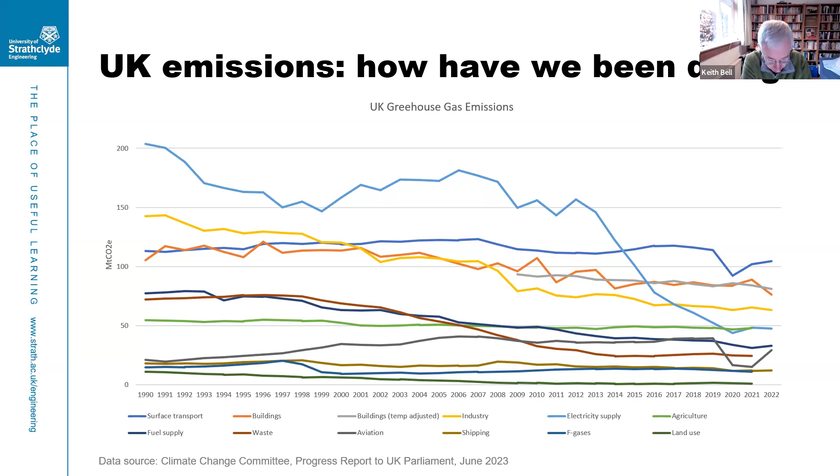So now the more dominant sources of greenhouse gases are surface transport, petrol and diesel vehicles, and energy in buildings. In the UK, we depend a lot on gas for heating our homes and other buildings. And then there's still quite a bit in industry in terms of industrial process emissions of CO2. Of course, greenhouse gases also include methane, which is why agriculture comes into the picture significantly as well.

Now, how we've managed to achieve such dramatic reductions in greenhouse gases from the production of electricity can be seen here, where that purple line represents the proportion of electrical energy generated from coal-fired power stations. It's gone down to almost nothing, actually. There's only 1 or 2 stations still operational, and they're quite low merit. They don't get used an awful lot. They're there a little bit for security of supply, I guess.

And the big increase in that yellow-orange line, which is low carbon sources of energy. We've had a fair amount of nuclear generation capacity, a little bit of hydro, but the growth there has really been thanks to solar power and especially wind power. There's a bit of a decline between 2000 and 2010 as some of the older nuclear power stations were closing.

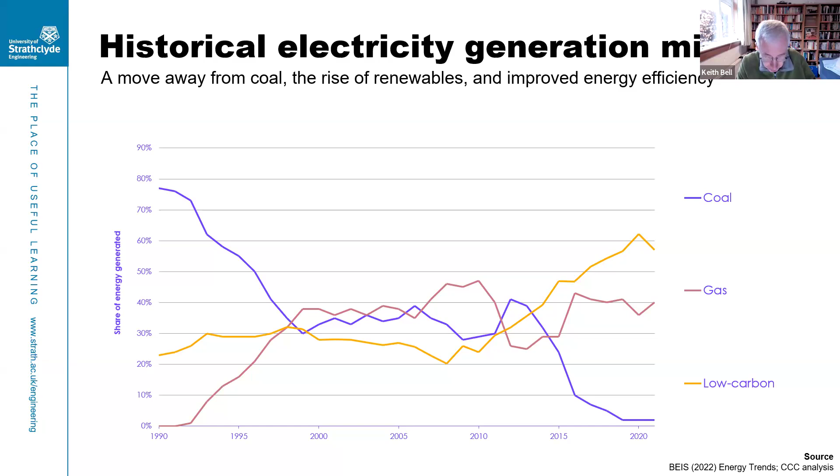The Climate Change Committee gives its advice on emissions reduction to the government in terms of setting carbon budgets, which means 5-year periods of time where we look at the uses of energy, but also other sources of greenhouse gases across the economy, and say, okay, we think our obligations as a nation internationally, in particular in more recent years in respect of the Paris Agreement, suggest we need to reduce emissions quickly. Looking at what we're already doing across the economy, where the emissions are coming from and what the costs will be of reducing emissions at different rates in different sectors, this is what we think we should be aiming at in a particular 5-year period.

Associated with that, this was the target that was agreed, or had to be agreed under the Paris emissions agreement, of a nationally determined contribution. This is where all countries coming to COP26 in Glasgow should be making promises about what emissions were going to be, a maximum level in 2030. So that kind of pathway from 2020 all the way through to 2050 helped to determine that nationally determined contribution, that NDC.

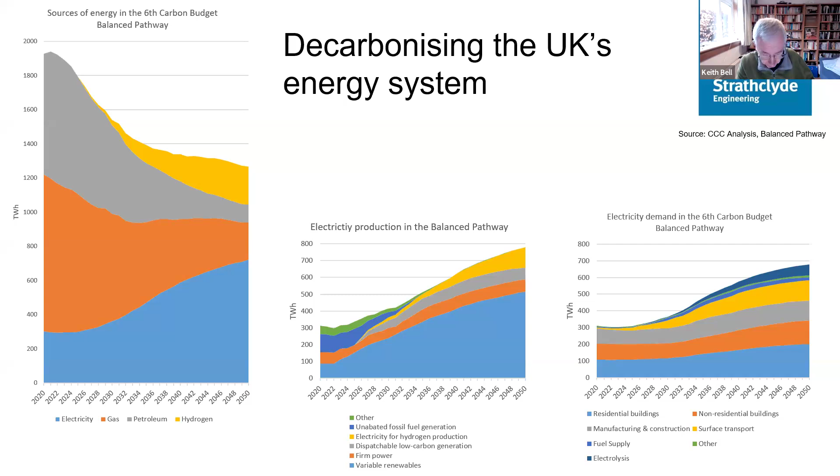But the question then for us as engineers working in the sector is how do we ensure that that supply of electricity, using these very different technologies from what we used in the past, is going to be reliable? Society depends on us. Can we make full use of low carbon electricity when it's available? And that, of course, is a function of the weather.

By changing the technology, it means we're getting rid of the synchronous machines that we've used for power stations for years and years, replaced with asynchronous technologies, wind turbines, solar PV panels. Given the variability of wind and sun, can we still meet demand all year round in every hour of the year? How do we build our new kind of capital stock? What's the capacity of wind and solar such that we don't waste the energy and we can maximize the utilization of the physical assets on the system?

And there's a broader question of resilience that I'll come on to as well. I think there are 6 kind of very particular power engineering challenges. As we get rid of the synchronous generation, the inertia of the system reduces. How do we make sure that the system still operates within an acceptable frequency band?

The short circuit current that synchronous machines deliver -- when there's a short circuit, there's a strong voltage source, the current becomes very high, and the high current is detected and helps the protection devices to realize that there is a fault, to isolate it safely. But if we're using things like wind turbines or inverters, power electronic devices, as the kind of interface between the energy source and the electricity system, they've got very strict current limits, and that short circuit current could be much lower. Will the protection devices that were designed for very different technologies still work?

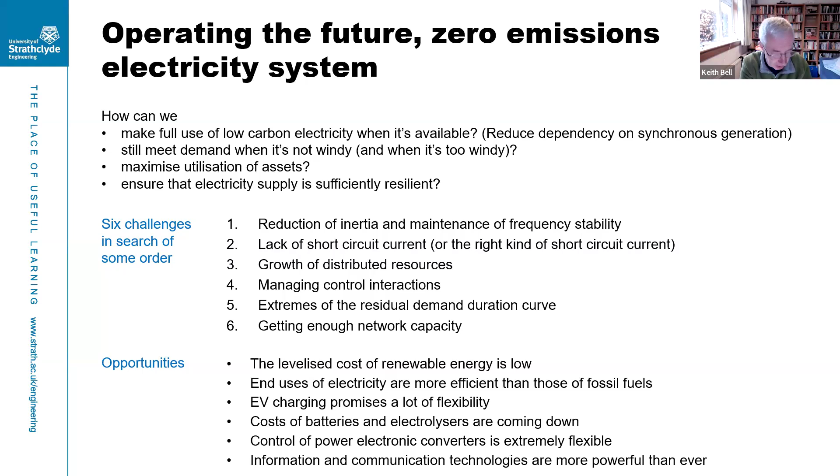Now, backing up the sixth carbon budget advice that the Climate Change Committee gave to the UK government, there was a report specifically on the power system that was published almost a year ago, actually, in March 2023, that asked this question: can we reliably get enough energy in a decarbonised power system?

And the report described some quite detailed modelling showing a realistic range of technologies, of sources of electricity to meet this 2035 target of a fully decarbonised power system. And sort of gave it some stress tests by looking at historical weather data to see the variability of wind and solar and how much would be available, including periods of very low wind speeds. Could we still meet demand during those periods?

And kind of one of the main enablers of that, the main means of moving a lot of energy, a lot of electrical energy from one week of the year to another week of the year is by turning that energy into hydrogen, storing it, and then using the hydrogen to generate electricity. And we're quite lucky, I think, in and around the UK that the geology is suitable for quite large scale storage of hydrogen, salt caverns in particular.

And we also wanted to look at one or two of the things that were in terms of the changing climate, rising temperatures and changing weather patterns that might represent some kind of risk to the electricity system, and how we should be dealing with that.

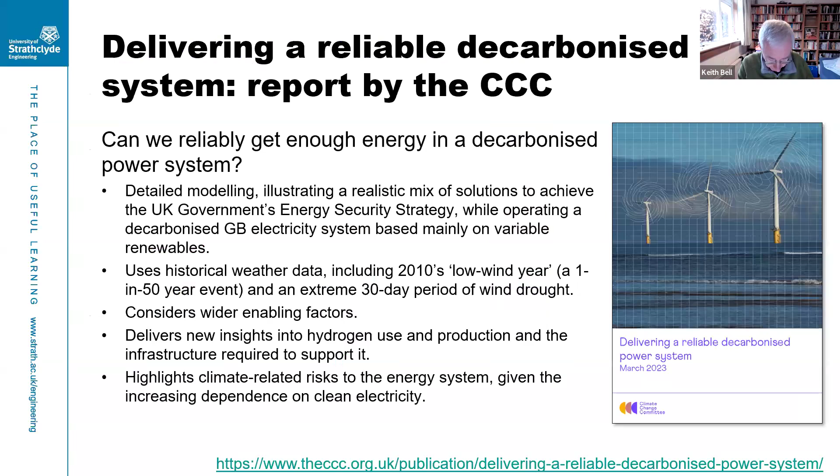So that generation mix, as I've described, is changing a lot, and you can see the purple bar at the bottom there, representing the capacity of offshore wind in particular. So yeah, we're an island nation, lots of sea. The North Sea out to the east of the UK, a lot of that is very shallow, so is ideal for the construction of wind turbines.

And although some of it gets a bit far away, there's an area called Dogger Bank, which is about the size of Wales. It's sort of quite in the middle of the North Sea. It starts to get sort of 150, 200 kilometers from the shore. So there's a bit of a network connection challenge there, but it's a fantastic energy resource.

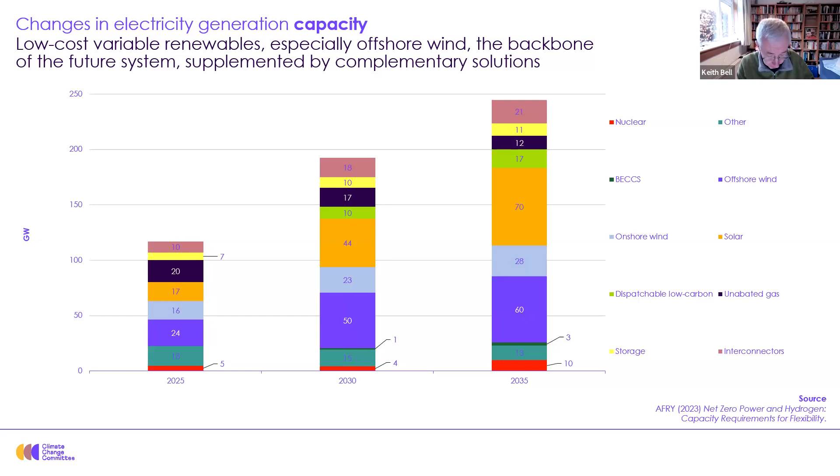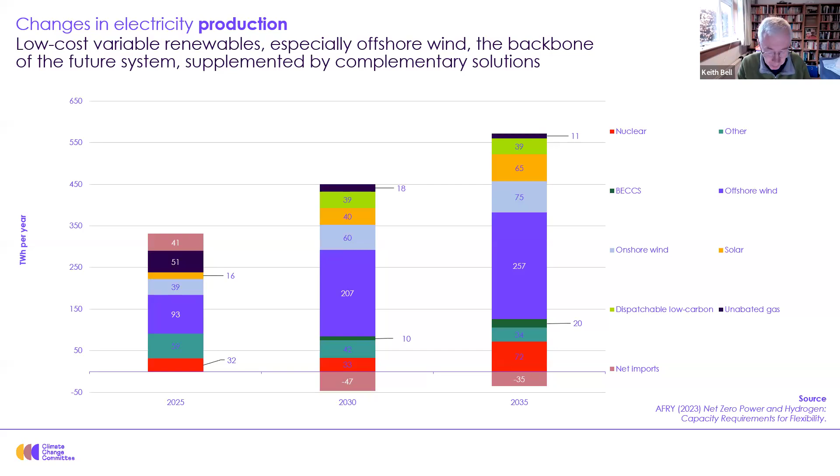And using that resource would generate hundreds of terawatt hours of electricity each year. And you can see the change, both the mix of sources of electricity and the growth of the electricity system. So we're simultaneously reducing the emissions per megawatt hour of energy that we generate at the same time as growing the electricity system.

What we need to achieve the target of 50 gigawatts of offshore wind by 2030, and 70 gigawatts of solar PV by 2035, is an enormous amount of investment in new generation capacity, much bigger than we've ever achieved, more than twice the biggest annual increase since 1990. And we've got to do that every year, out to 2035 and indeed beyond.

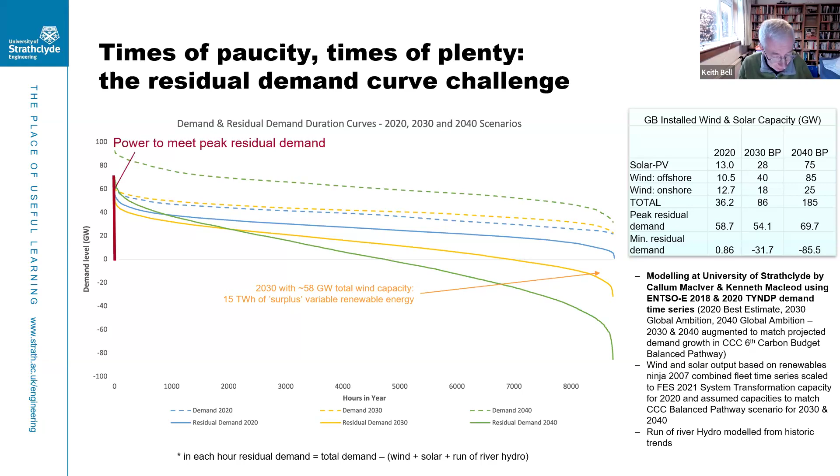And those are the solid lines. If you look at the green one, some of the time we've got a massive deficit — we need to fill that gap from something. And some of the time we've got a big surplus. So we need enough power generation capacity to meet that peak of residual demand, something other than wind and solar. Over time, that's the energy we need that's not from wind and solar. But down there, the green area is the surplus — more available power from wind and solar than we can use in that single hour.

So what can we do with all that surplus? How can we meet the peak at the least cost? If we don't use all this available energy, that's a cost to the developers — energy they can't sell, and it seems like a wasted resource. What's the means of balancing those out? As I said, potentially the main means we could do that is to use that green amount of surplus energy to generate hydrogen, store it, and then use it to meet that demand in the red block.

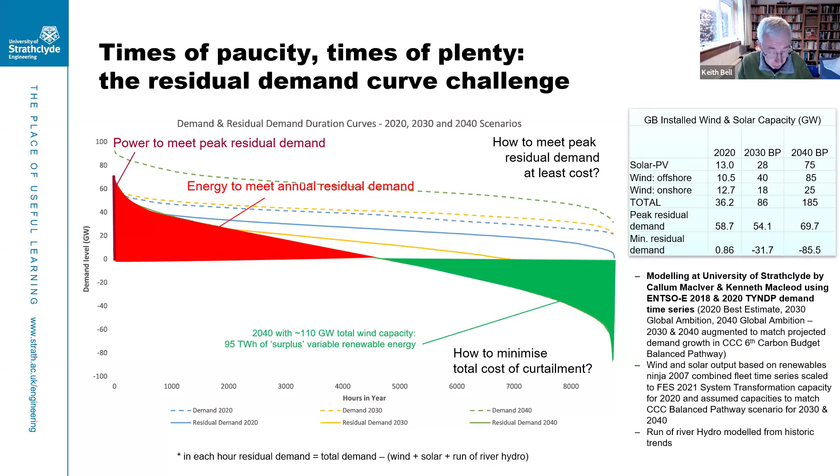The scale of that, even with smart charging of electric vehicles, gets up to terawatt hours. On the left, the blue line is the demand on a particular modeled day for 2030. The residual demand on that day, which happens to be quite a low wind day, is the orange line. If we smooth that out by moving some electricity use from one hour to another — for example, electric vehicle charging — that's the green line. But we still have that total demand to be met, the area under the line, which in this particular day adds up to about 900 gigawatt hours.

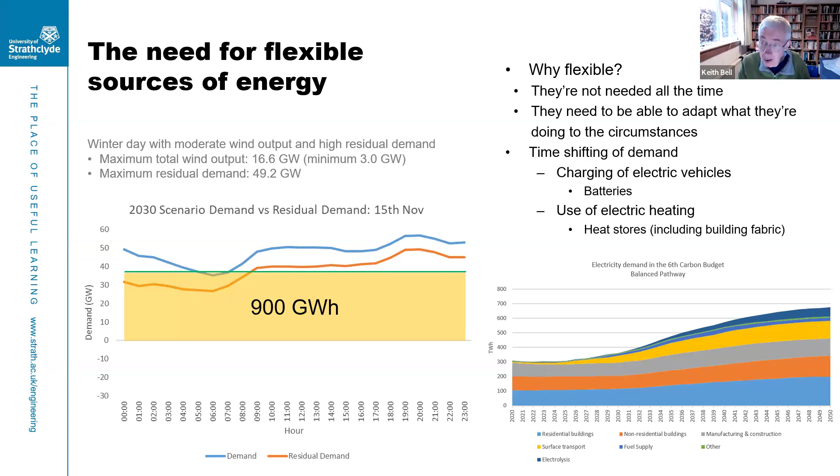That flexibility of moving electric vehicle charging around is very useful, but it isn't the whole story. We've still got to meet all of that demand somehow. If we had a week like that, it's getting towards 6 or 7 terawatt hours of energy to be found from somewhere other than wind and solar. There's a German word I've heard used quite a lot, Dunkelflaute, which means literally the dark doldrums — when there's not much sunlight and not much wind either.

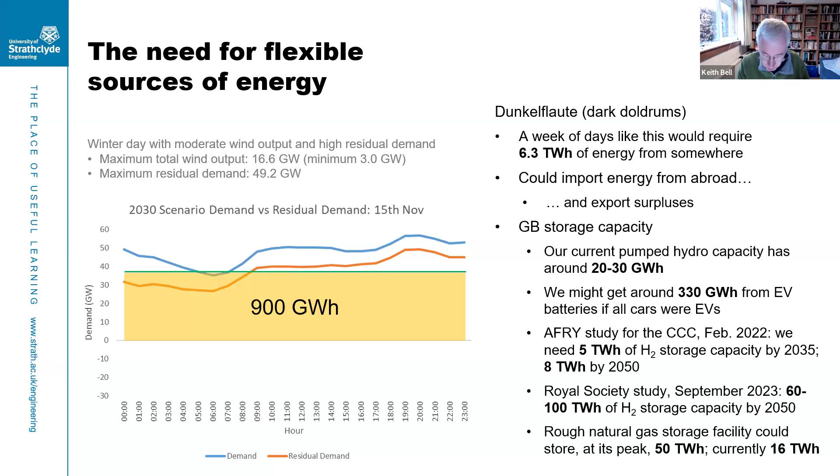Interconnection is very helpful here. Although Great Britain is an island, it's becoming increasingly interconnected with other countries around Europe — there are now two, maybe even a third interconnection with France, one to Belgium, another to Denmark recently gone into service, one to Norway, and so on. So we can possibly exchange our surpluses and deficits, although not if they've got the same weather patterns at the same time. Other sources of flexibility could be useful, but they don't quite get to the scale of terawatt hours that we need.

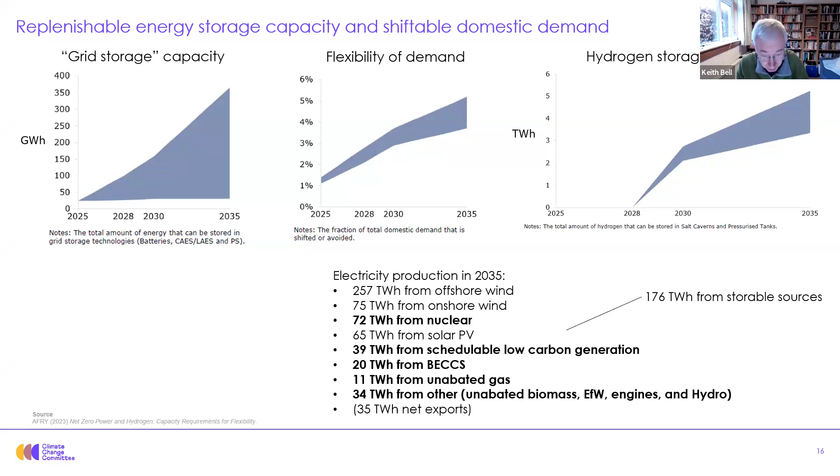Even if it's not from hydrogen, there are other sources of storable energy that let us turn them into electricity when we need them, when it's not windy and sunny. That still adds up to a lot from somewhere, which might be natural gas, provided we can use it with carbon capture and storage, or maybe a small amount unabated, meaning we're still letting the carbon dioxide out, just for security of supply, provided we keep that number very small. In this modeling for 2035, about 2.5% of electrical energy production comes from unabated natural gas. Unfortunately, if that number was bigger, we'd have to reduce emissions in other parts of the economy, and that's harder. That's why we're trying to decarbonize the electricity system first.

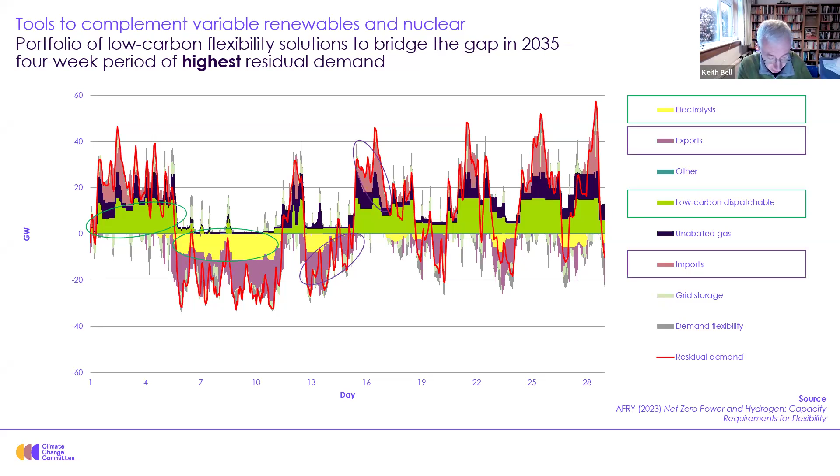These residual demand curves lose the hour-by-hour sequence of demand and generation, so ramping, the ability to increase output from a source and then decrease it again, is extremely important too. Here's a red line representing the residual demand, the difference between demand and what's available from wind and solar. We see low carbon dispatchable generation helping meet it when it's positive, and electrolysis, generating hydrogen, using up the surplus renewable energy when residual demand is negative. Other things help too, imports and exports through interconnectors with our neighbors, and a small amount of grid storage, network connected batteries and pumped hydro. Helpful, but in the overall scheme of things, not enormous.

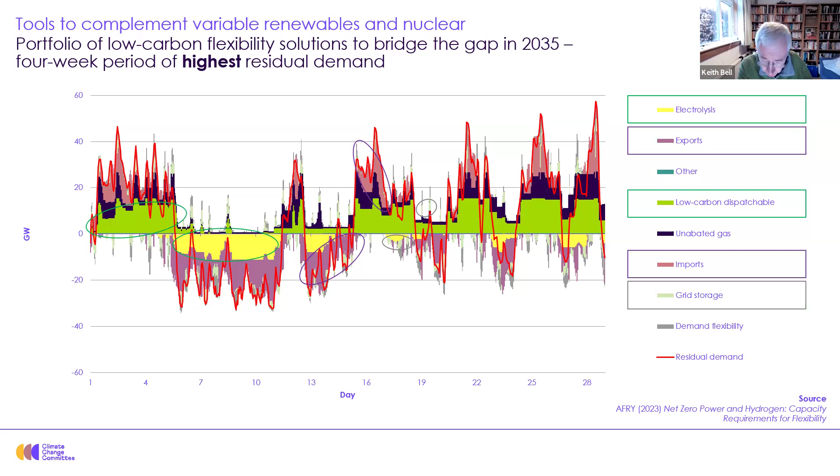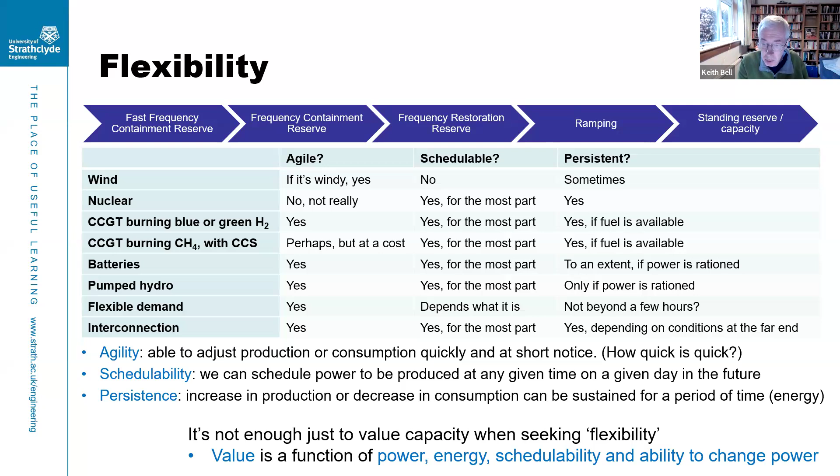Natural gas still has some role, albeit declining, but where do we get that green energy from? Here's the capacity of what we call low carbon dispatchable - it could be burning low carbon hydrogen, or burning natural gas with carbon capture and storage.

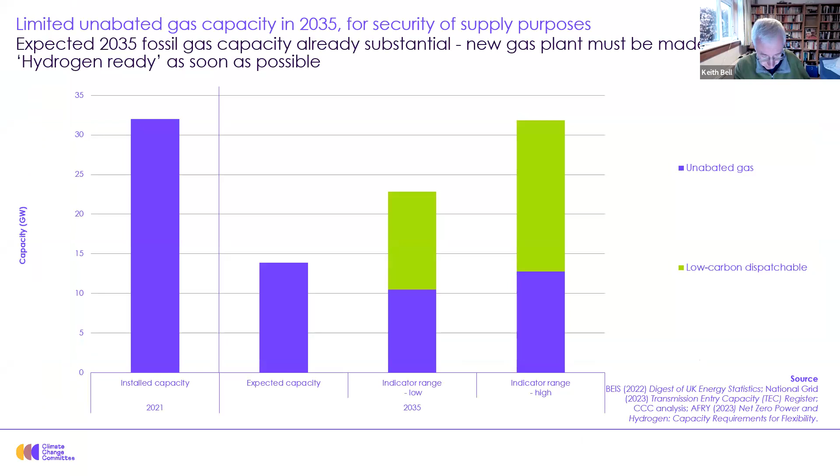Now we have to keep the system stable, and it's already presenting some challenges. We've had some events on our power system in Britain, and sometimes people who are quite opposed to decarbonisation like to blame renewables for things that go wrong. There was an incident back in 2019 when quite a lot of demand, 1.1 million electricity consumers, were disconnected within just a few minutes of a disturbance on the system. It turned out a combined cycle gas turbine tripped at almost the same time as quite a large wind farm, triggered by a lightning strike on an overhead line, quite a normal thing. But actually, there were control system errors at both of these stations.

I found myself talking to various media, newspapers, TV and radio, trying to explain what was going on. You can see a headline from one of the newspapers we have in Scotland, the Scotsman, saying 'wind power not to blame for major UK blackout, says Scots professor.' I think the Scotsman liked to emphasize that I'm based in Scotland.

Which my daughter found quite amusing and posted on Facebook - who wants to tell them that I'm not Scottish, actually I'm English.

I mentioned resilience, and what does that mean? We've talked about resilience quite a lot in engineering, in respect of climate resilience, societal resilience. For me, it means there are disturbances that are going to happen, kicks to a system for whatever reasons - it could be to do with the technology or the weather. We have to try as much as possible to prevent adverse impacts on, in our case, energy users. And if we can't prevent those adverse impacts, at least we can limit and contain them. And then we also want to be able to recover from them. So it's about prevention, containment, and recovery.

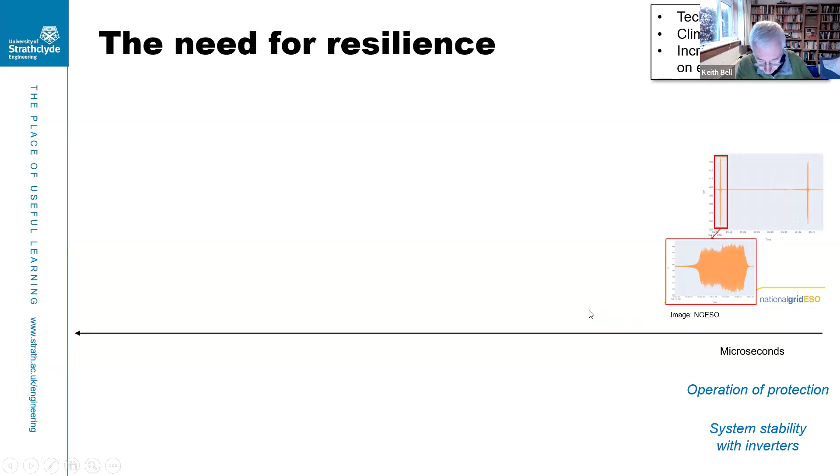Here's this incident from 4 years ago now, which is more to do with electromechanical stability, looking over timescales of milliseconds, how the controls are interacting. But there are also these things at a scale of minutes, which I was talking about a little while ago, about the ramping up of different resources, the need for flexibility, but also resilience against storms.

Here was a picture from a storm in Scotland from November 2021. There were, I can't remember now, something like 19,000 homes off supply, some of them for a week or 10 days, when they're depending on electricity for their heating in the middle of winter.

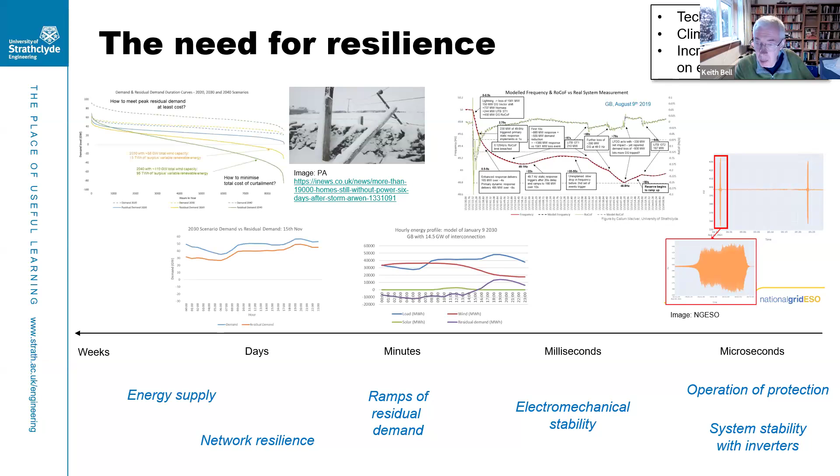Unfortunately, with the benefit of hindsight, we would have connected those things in a different way, put obligations on these smaller generators for monitoring and control, so that the system operator can really know what's going on and whether they represent any kind of threat to system stability - or indeed an opportunity, as these resources could contribute to stabilizing the system, for example regulation of frequency.

A lot of these renewable resources, as I mentioned, are located offshore, many of them in the north. So here in Scotland, where I'm speaking to you from, it's a very windy place, and inevitably it's very popular for the development of wind farms, but they tend to be a long way from the main demand centres, most of which are in the south of England, especially in and around the southeast. So there's a lot of need for reinforcement of the network, and a lot of that is being done offshore, putting high voltage DC cables along the seabed. It's more construction on the network than we've done in many years, certainly since the 1960s.

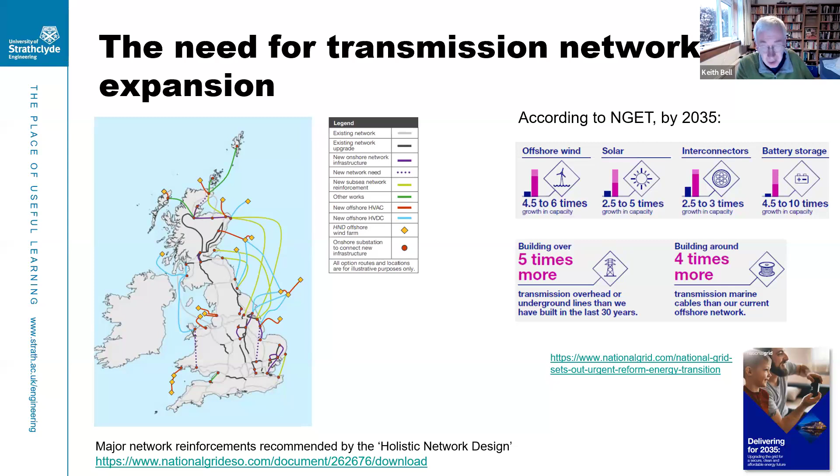One way of looking at that scale of need for network capacity, certainly on the transmission network, is to think about how many megawatts travel over how many kilometers in each hour of the year. We can add all those up for all the hours, and we find it adds up to a few million megawatt kilometers. The blue line is showing how many million megawatt kilometers the electricity would travel if we had an infinite network, like a copper plate. We don't have an infinite network - some of that transfer is constrained, some of the wind output has to be curtailed and replaced with gas generation, and that represents the orange line.

But when we look ahead to 2030 or 2035, we can see a dramatically different picture. If we had a copper plate and could use all the resources without having to constrain anything because of network capacity, the maximum number of megawatt kilometers would be as many as 25.

So yeah, 2.5 times bigger than we've got today. Already there are big plans for reinforcing the network that will facilitate a lot of that transfer, but not all of it. So there's a maximum there of about 13 million megawatt kilometers. I mean, hopefully that gives a sense of scale of how much the system is changing.

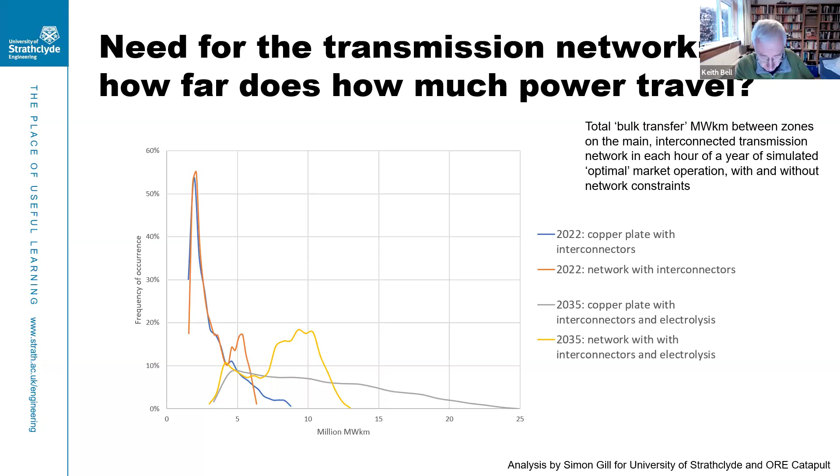The question of inertia is one that comes up a lot among power system engineers. And it's really to do with the kinetic energy that's stored in the rotating plant, the synchronous plant, where a mechanical system of rotation is tightly coupled with the alternating current on the electricity system.

And what happens now is that that kinetic energy can be used to stabilize. And as we get rid of some of this synchronous plant, that kinetic energy that we can access automatically is reduced, and lets people worry about whether there's a certain minimum inertia that we should make sure we always have, or a maximum non-synchronous penetration of sources of electricity.

So there were some studies done by a PhD student of mine a few years ago that showed actually we don't need to be quite so worried. One of the nice things about batteries is you can get the energy out of a battery very quickly. And so long as you can measure the need for a response, actually you can manage these variations and stabilize system frequency in the event of a loss of a large source of energy.

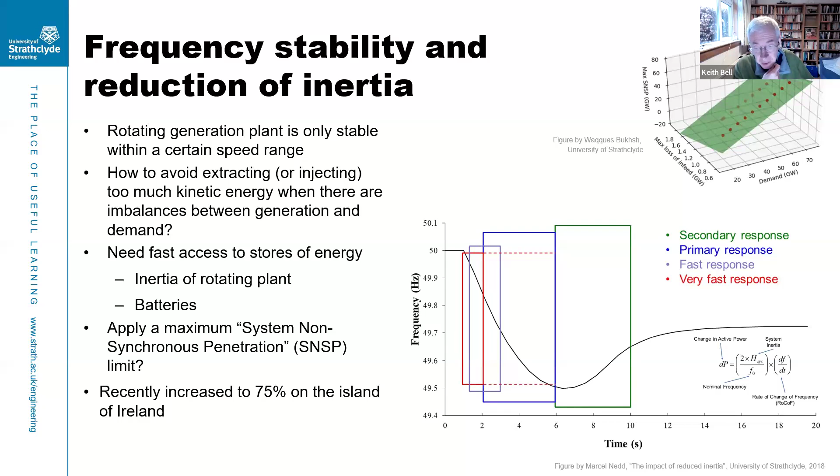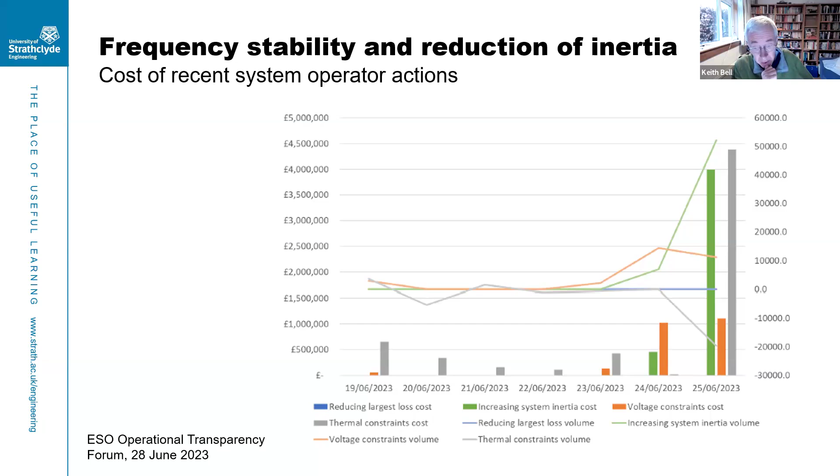But as it happens, the system operator is already spending a lot more money than they used to on operating the system and trying to make sure it remains stable as the generation mix changes. So, maybe focusing on that green bar where they're paying for a certain level of inertia and paying a lot more than they ever used to. Also increases in what they're paying to manage voltages on the network as well.

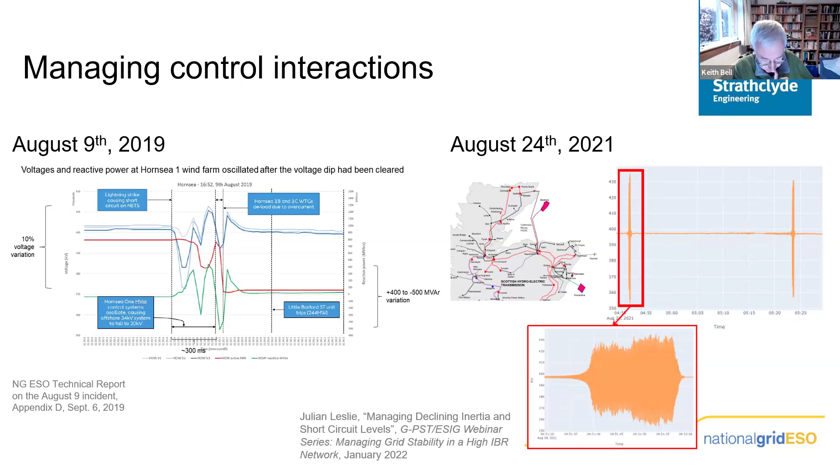I also mentioned the operation of protection on the network. So I think it's not just that the level of short circuit current is reducing, but the nature of it is changing. And it depends a lot on the specification of the inverters, whether they can deal with an unbalance between the three phases of a power system.

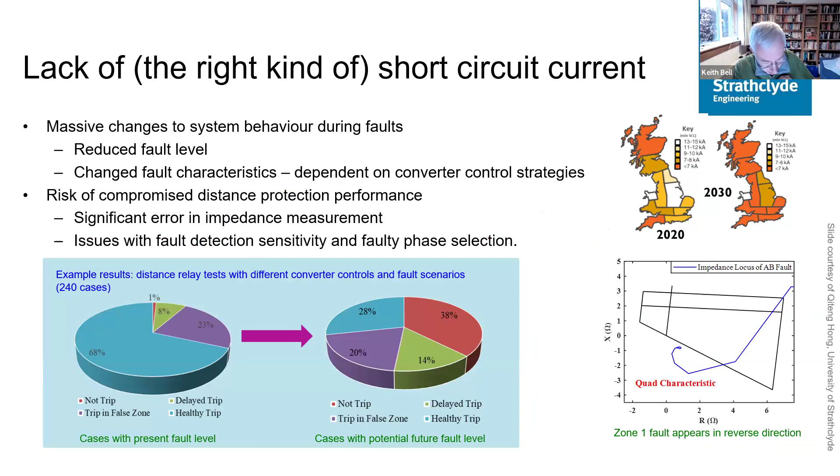And the last thing I'll mention about all of this energy transition, there's a lot of engineering to be done, a lot of opportunities actually, but also especially there's a need for people to do all of this, to do the analysis and to deliver the investment and to operate the system. So if you've got children, nephews, nieces, friends, young people who are looking at what they want to do in a career, I think this is a fantastic career to come into, a fantastic area to come into, where you can really make a difference for the good of global society.